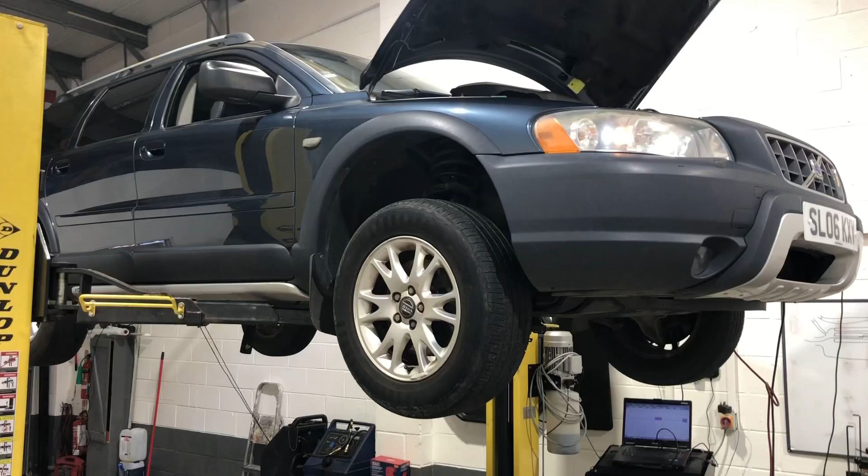Got this 2006 Volvo V70 Cross Country in today. The customer's complaining that the four-wheel drive system's not working on it, so let's have a look.

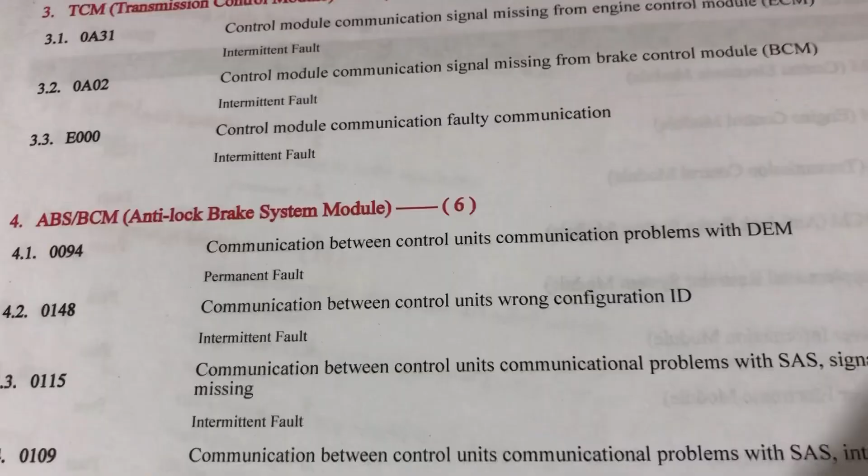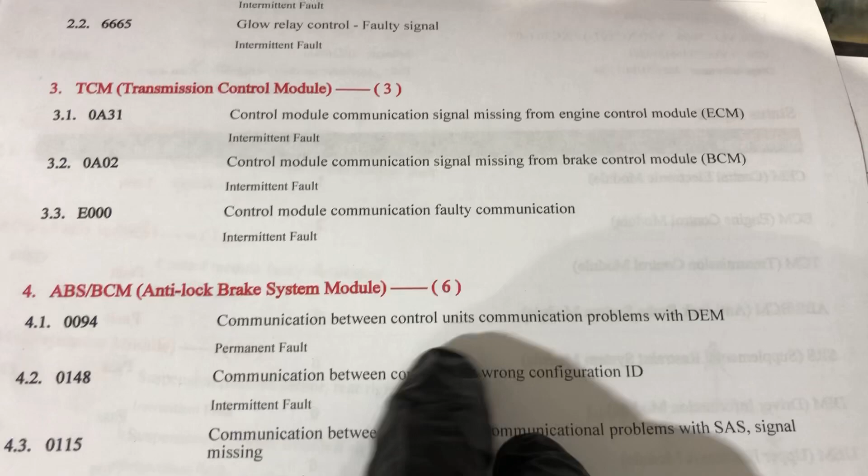Printed the fault codes out. There's faults all over the vehicle, to be fair, for all kinds of other issues, but let's focus on the four-wheel drive. The fault that stands out is this 0094 communication between control units, communication problem with DEM. DEM is the four-wheel drive system.

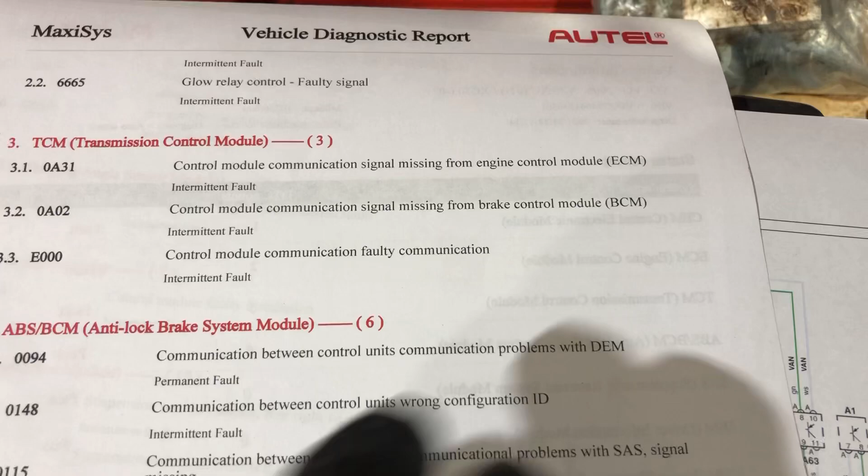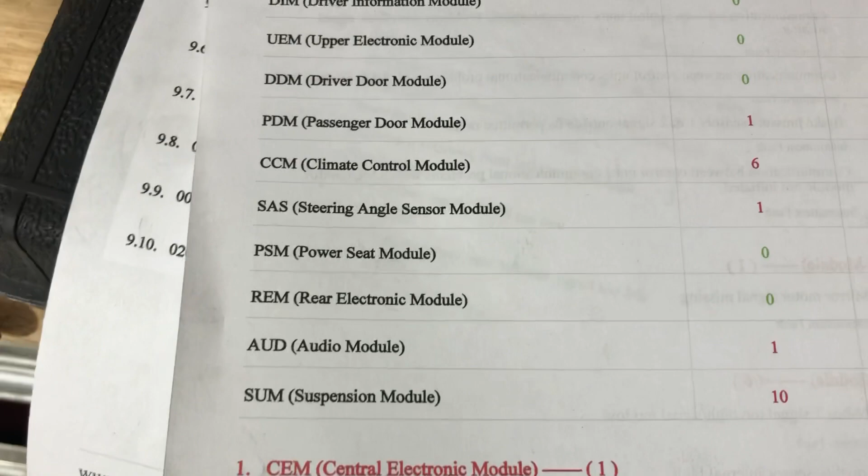So I've got the car elevated, as you can see on the ramp, and I'm going to check the wiring to the DEM. Also as well, when I look through the list, I've done a full scan on the car, and the DEM does not appear anywhere on the list. So it would appear that the DEM isn't communicating, or there's no communication to the DEM for some reason.

I'm under the back of the car here. This is the DEM here. It's a control unit attached to the rear diff. It's actually a Haldex rear diff, same as what you find on Volkswagens and what have you. So it has a multi-plug onto it here, which is basically an 8-pin plug, but there's only 5 of the pins populated.

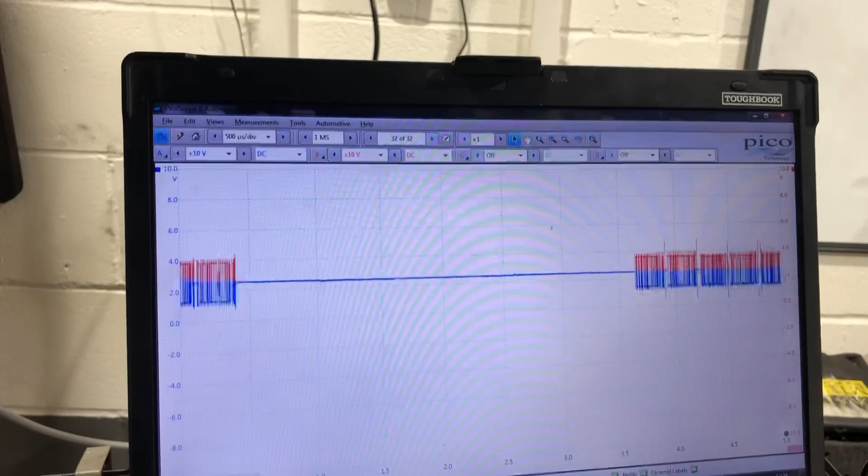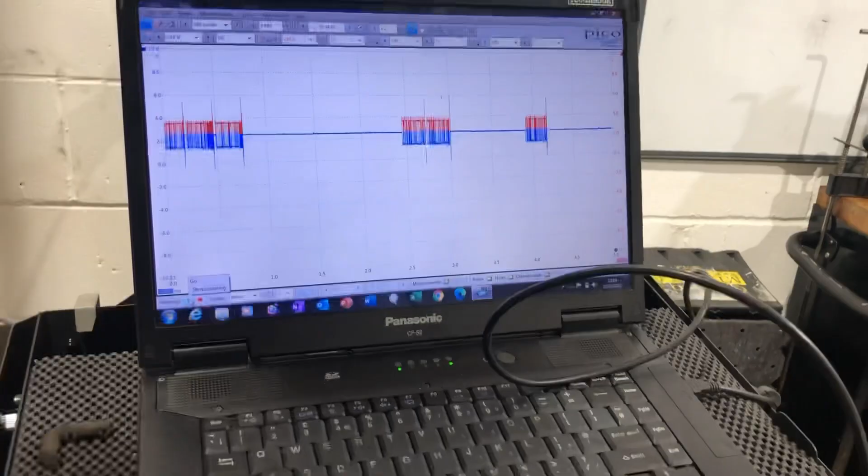The green/white wires, you see I've got a probe there, are the CAN communication lines. So I've got that connected to the scope, and as you can see, there's CAN communication to the DEM. So the CAN lines are intact. Next thing I'm going to check is that I've got powers and grounds. To do that, I'm going to use a multimeter.

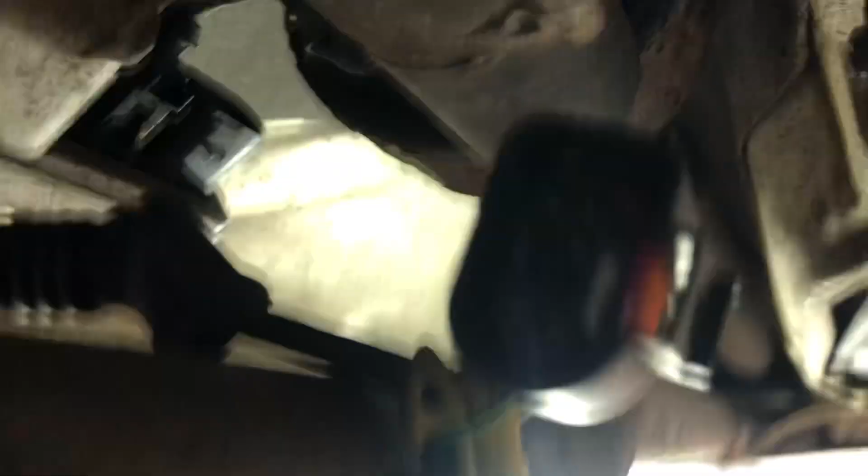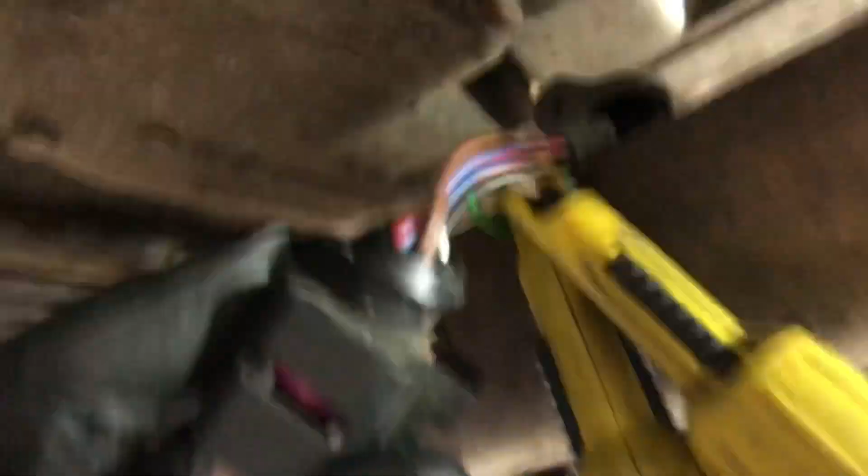I've got it connected to my power probe extension, and turn that plug around so I haven't got the light off the lamp. So I'm on the ground at the minute on the tail of the multimeter, so I'm looking for the power, which I believe is the red and blue wire. So it's this one here, and as you can see, I've got power. So I've got power to the DEM.

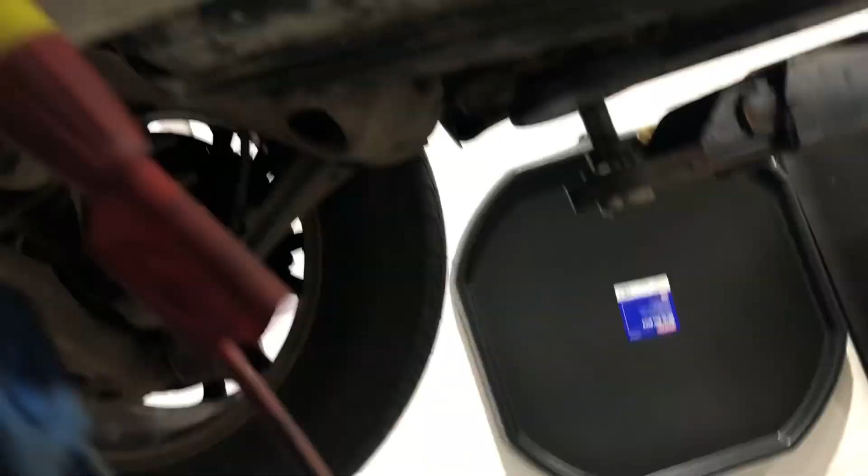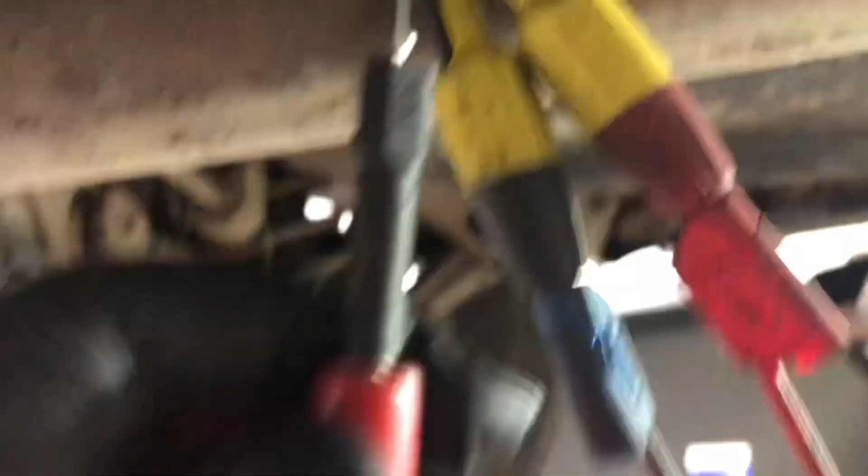Next, I'm going to put my multimeter onto the power side, or the positive side of the extension, and I'm going to check the grounds. There's 2 grounds on this. There's the brown wire and the black wire. So again, same test. I've got a ground on that one. And I've got a ground on that one. So I've got power and ground to the unit.

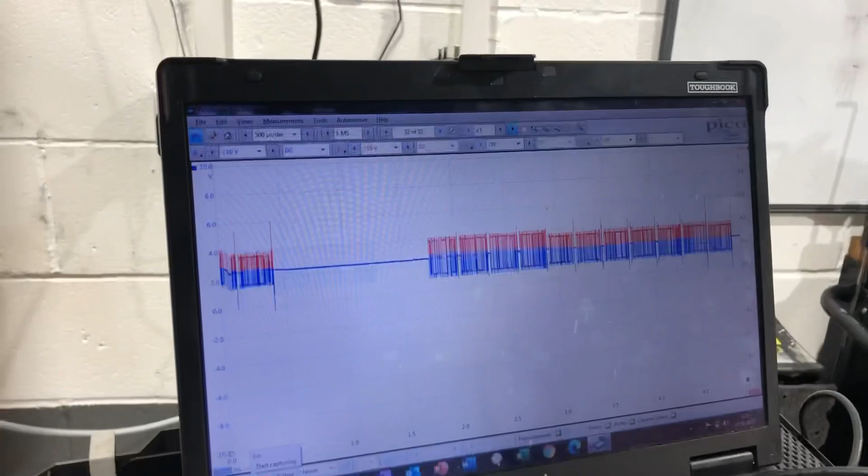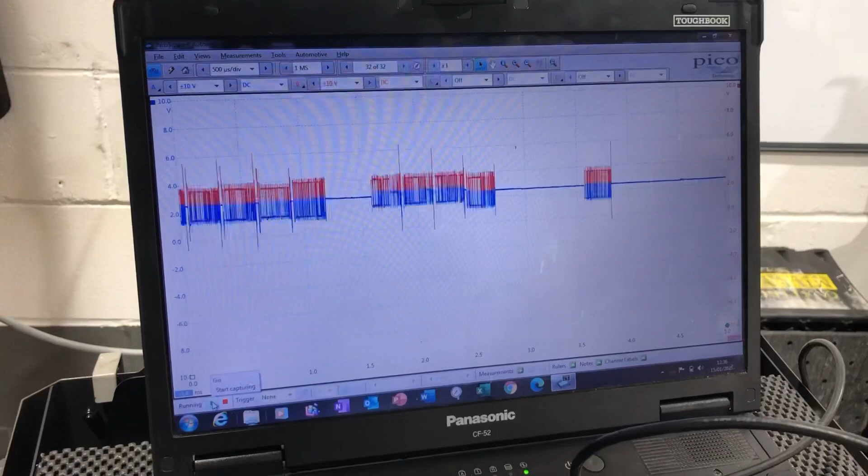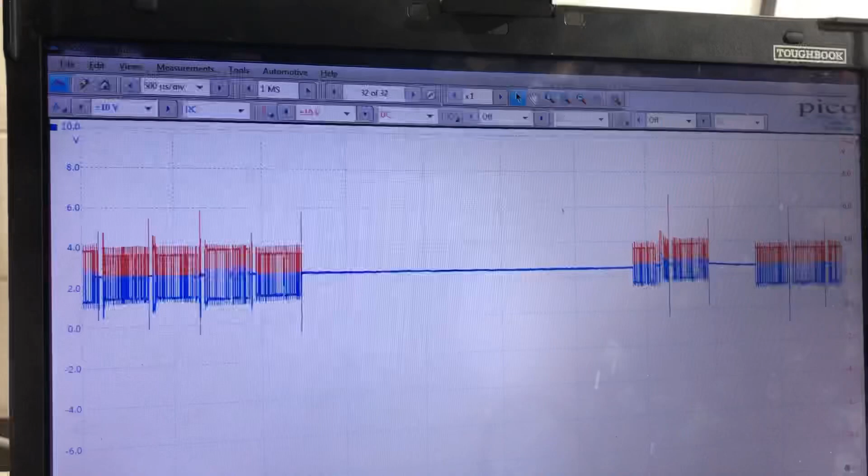I've got a CAN signal to the unit. So the next thing I'm going to do is plug the unit back in and check the CAN lines to make sure the unit itself isn't actually pulling the CAN communication signal down. There's the unit plugged back in. Let's have a look at the CAN. And we've still got a good CAN signal. So the unit itself isn't pulling the CAN down.

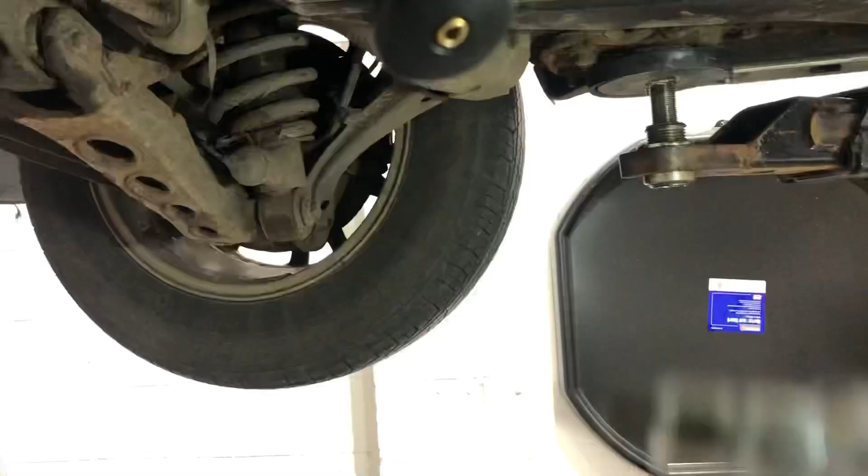Next thing I need to do is check powers and grounds to the unit while it's plugged in. Access is a bit bad to the back of this plug, so I'm having to use side probes on this. I will be putting liquid tape on the piercings that I've made. So, test lamp attached to the power side of the extension lead. First thing I'm going to do is check the grounds. The grounds are on the black probe and on the black Pomona probe.

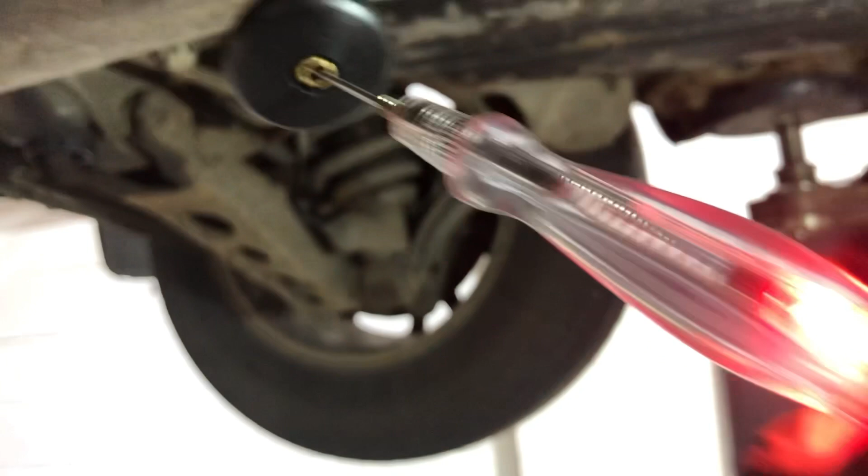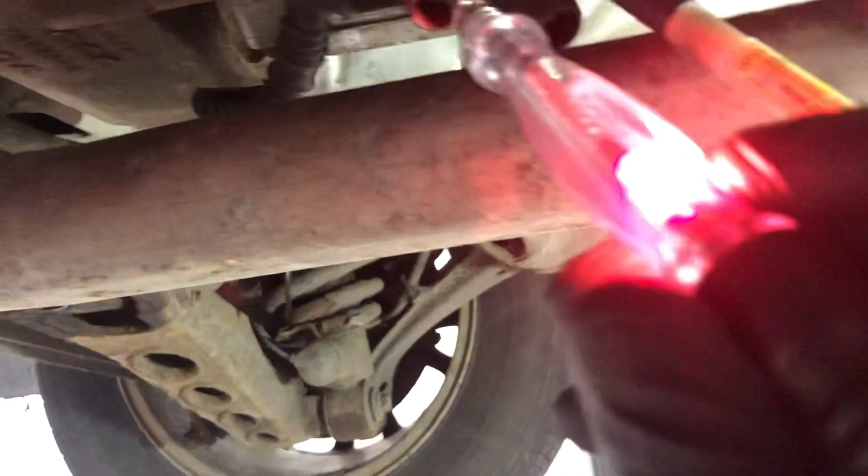So again, got a good ground. I've got a good ground. Now I'm going to change the test lamp onto the ground side of the extension. Now onto the red Pomona. See if the power is still good. And yeah, still got good power there.

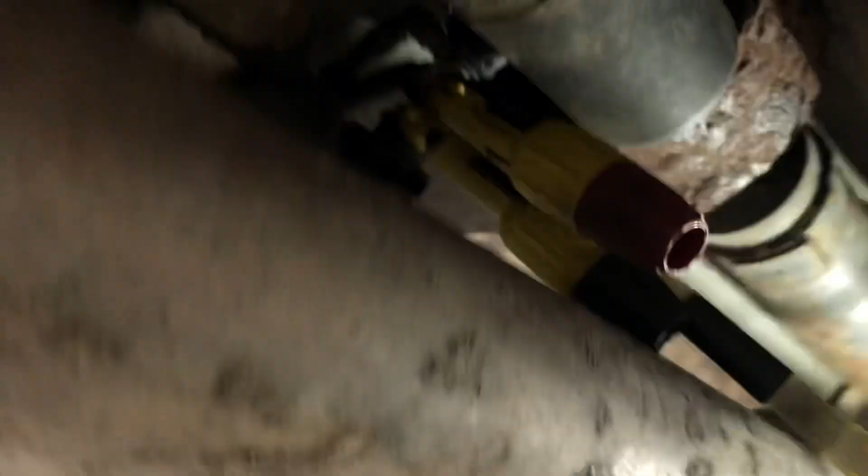So I've got powers and grounds to the module, good power and ground. I've got good CAN to the module. So unfortunately, I'm going to call the module has failed on this vehicle. I'll speak to the customer because, as I say, there's a list of other faults with the car. Obviously this module is going to be an expensive fix, so I want to see which way he wants to go forward before I start investigating the other issues on this vehicle.